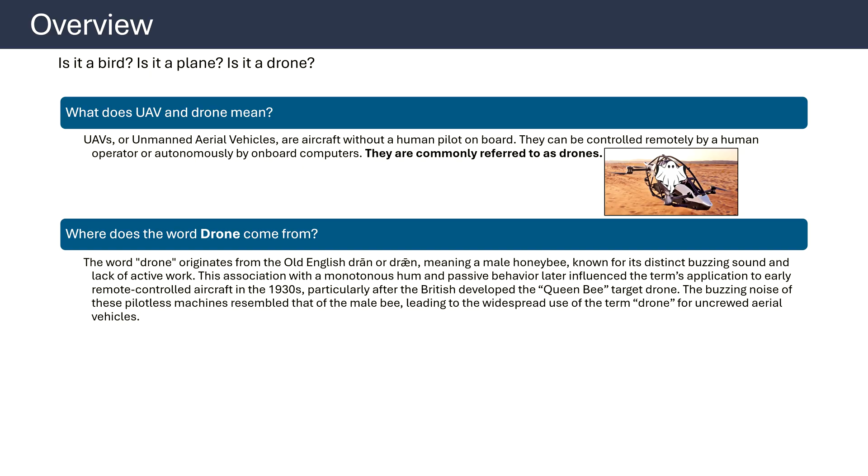An unmanned aerial vehicle, or UAV, is an aircraft with no pilot on board, flown remotely or autonomously. Drone is just a common shorthand. The word drone traces back to the male honeybee. In the 1930s, the British Queen Bee target aircraft had a distinct buzzing sound that popularized the term for pilotless planes.

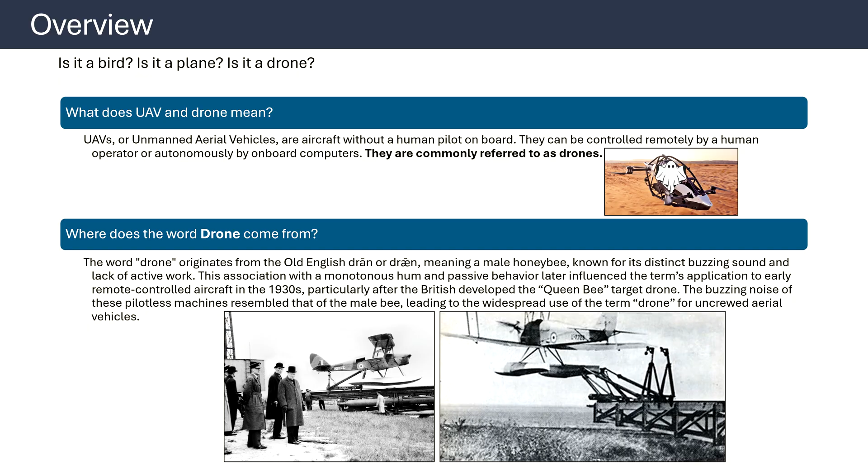The UAV industry in South Africa has evolved into a dynamic and multifaceted sector, combining world-class technological innovations with strategic applications across both civil and defense domains. As of 2024, South Africa's UAV market is valued at over $500 million, with projections of surpassing $1.2 billion by 2030. Home to a diverse ecosystem of drone manufacturers such as Alti, Denel Dynamics, and Milkor, the country also hosts leading subsystem providers like S-Plane Automation and Rautec.

Applications span precision agriculture, mining, infrastructure, inspection, security, and emergency services. While the industry benefits from duty-free imports on most components and a supportive government initiative under the fourth industrial revolution, it still faces regulatory and funding hurdles. Nevertheless, South Africa remains a regional leader, positioning itself as a hub for UAV innovation, services and exports across the African continent.

South Africa's UAV sector is set for rapid growth, fueled by advanced technologies like hydrogen propulsion, swarm systems, and AI analytics, alongside regulatory reforms enabling BVLOS operations. Backed by initiatives such as the Drone Council and Aerospace SEZs, the country is strengthening its manufacturing and exports, cementing its role as Africa's UAV innovation hub.

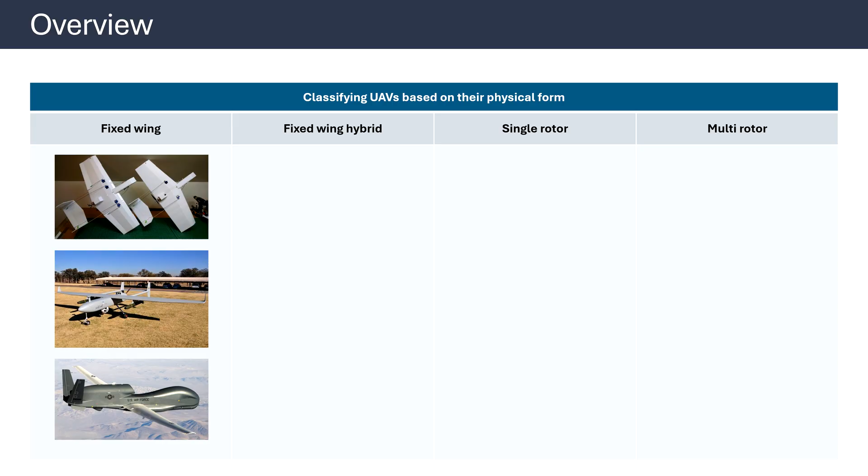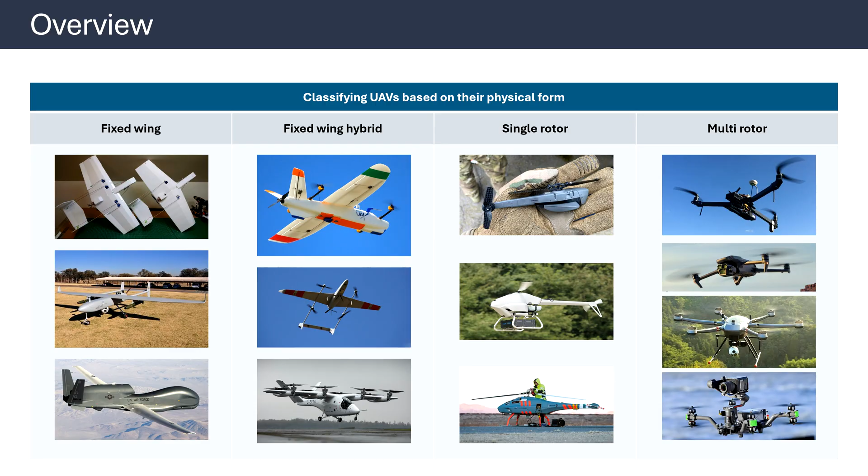Four form factors dominate the skies: fixed wing, a long-range endurance-based platform that often needs manual launch and landing solutions. Fixed wing hybrid VTOL has vertical takeoff, efficient wing-borne cruise, and is ideal for mapping and patrols. Single rotor or helicopter, efficient with heavier payloads but more mechanically complex. And then multicopter, the workhorse for inspections, media, and security. Agile hovering but with shorter endurance.

In the mid-1970s, the Council for Scientific and Industrial Research, CSIR, in Pretoria began work with Kentron on a small lightweight surveillance UAV called the Champion, which first flew in 1977. Four were built, a pre-production model and three production models numbering 101 to 103, and some or all were deployed to what was then Rhodesia for operational trials, while providing surveillance assistance in that country's civil war. This set an early lab-to-field loop that set the tone for local innovation.

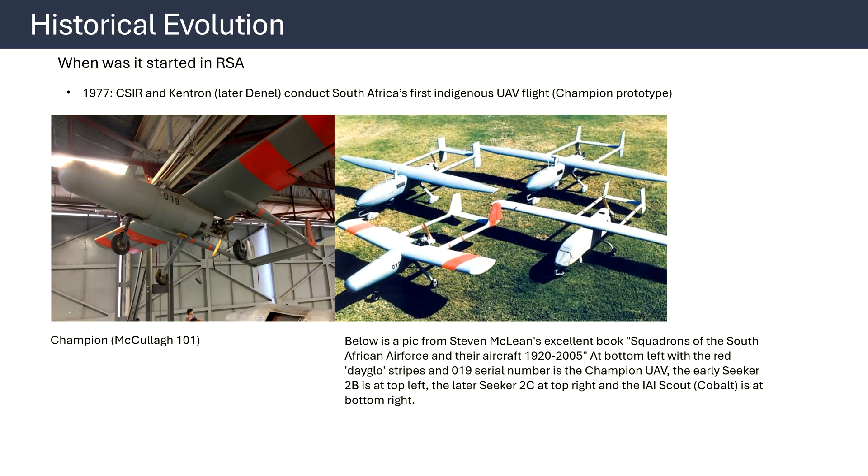South Africa's UAV timeline starts with CSIR and Kentron's Champion prototype in 1977, a laboratory-to-field leap that set the engineering tone for decades. Through the 1980s, the SADF fielded IAI Scout systems operationally, establishing doctrine and crews. In 1987, the locally built Seeker-1 entered service and saw real-time combat use, anchoring an indigenous capability. In 1994, Seeker-2 brought upgrades and experimental stealth work like Seraph, while ATE's Vulture introduced zero runway, catapult launch and net recovery tactics suited to bush operations.

In 2004, Denel unveiled the Bateleur concept for long-range maritime surveillance. Civilian crossover accelerated next in 2012 as Seeker-2 supported anti-poaching in the Kruger National Park, and by 2014, Desert Wolf's Skunk octocopter pioneered non-lethal crowd control payloads. Regulations caught up in 2015 when Part 101 made South Africa the first African state with a comprehensive drone rule set, catalyzing a commercial boom.

Hybrid VTOL leadership followed as Alti popularized transition platforms in 2016-2018. The country's export credentials strengthened with Seeker 400 deliveries in 2021, and Africa's largest indigenous MALE, the Milkor 380, achieved its maiden flight in 2023.

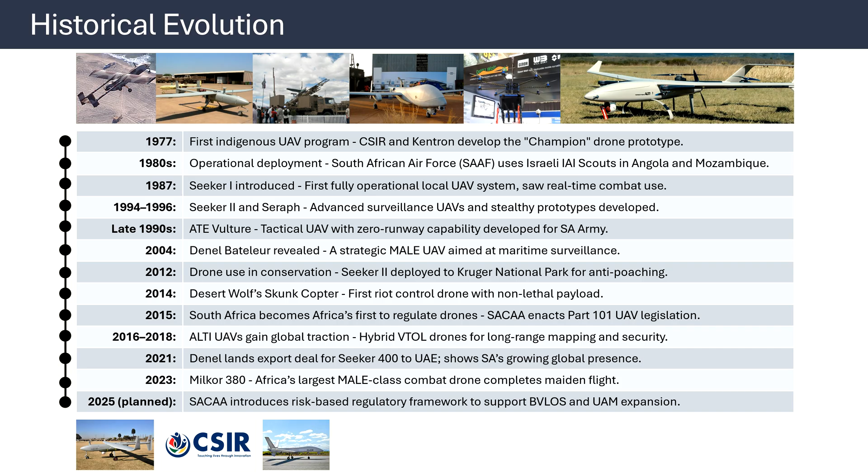Here's the map for the rules of the road. South Africa's drone regime sits on the Civil Aviation Act, with Part 101 and CATS 101 as the day-to-day rulebook. Commercial flying pairs people approvals with organizational approvals and basic airworthiness. South Africa's drone rules rest on three layers. The Civil Aviation Act of 2009 sets the legal foundation. The Civil Aviation Regulations, notably Part 101, spell out how RPAs are operated, and CATS 101 provides the technical standards that make those rules enforceable.

In practice, Part 101 is the everyday rulebook shaping who may fly, what must be approved, and how the risk is contained in commercial missions. It's also worth remembering that South Africa led Africa by publishing a comprehensive drone rule set under Part 101 back in 2015, which is why so much of the industry language you'll hear maps back to this structure.

If you're flying for business, you stand on three pillars. First, the Remote Pilot License, RPL. You must be at least 18 years old, hold a Class 3 medical, pass theory, and demonstrate competence in a flight test. Second, the Remote Operator Certificate, or ROC, at company level, which formalizes your SMS, operations manual, and named post holders. Third, Operations Specifications, or OPS specs, the exact privileges that you are authorized for, such as night operations, E-VLOS, B-VLOS, or dropping articles.

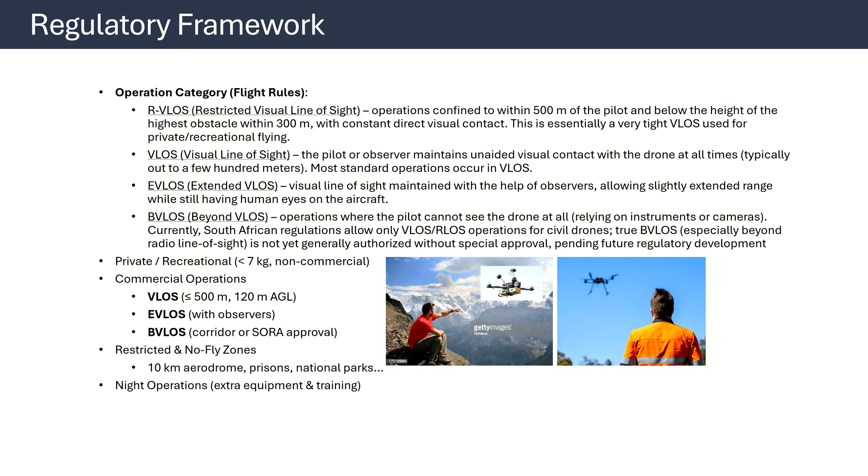Flight rules scale by risk. RVLOS keeps you within 500 meters and below nearby obstacles. VLOS means you or an observer can always see the aircraft unaided. E-VLOS extends range with trained observers and an agreed-on communication plan. And B-VLOS takes you beyond visual line of sight, only with specific authorization and robust mitigation. B-VLOS demonstrates detect and avoid, reliable C2 links, and fail-safe profiles backed by procedures and training.

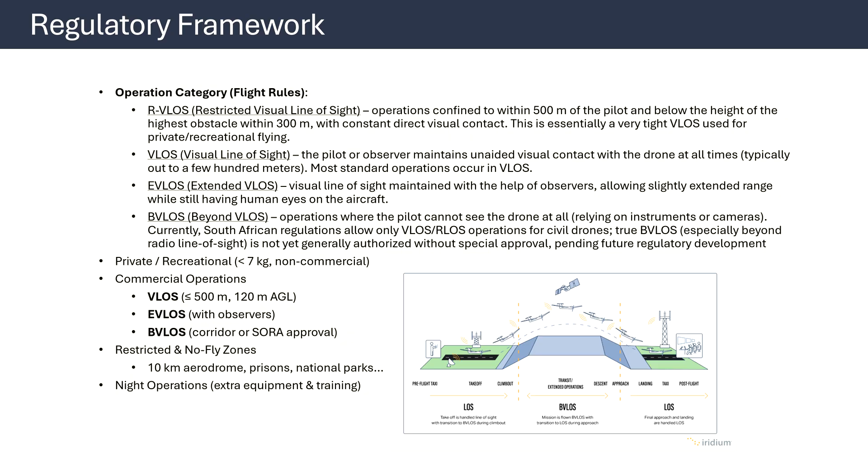Baseline commercial limits remain less than 120 meters above ground level, daylight only, and standoff from people, roads, and buildings, with a 10-kilometer buffer from aerodromes, unless coordinated and approved. Integration is happening step by step through controlled trials and corridors. South Africa has enabled B-VLOS experimental corridors, such as the Western Cape's Drone Corridor and the Krugersdorp test range, while prototype use-based trials explore live tracking, dynamic geofences, and remote authorization.

But B-VLOS remains permission-based. Operators submit CONOPS with mitigations like DAA, long-range C2, and structured risk assessment. A notable case was United Drone Holdings, securing South Africa's first B-VLOS waiver by fitting Iris Automation onboard detect and avoid to autonomously avoid conflicts.

Safety lives in routines. It is recommended to run pre-flight risk assessments such as SORA-Lite, so hazards and mitigations are explicit. Follow battery safety and lithium-ion fire protocols. Satisfy detect and avoid expectations as mass and mission risk increases. Keep clean maintenance schedules and logbooks for both aircraft and pilot.

Currently, regulators and industry are converging on geofences as the default safety net and remote ID as the digital license plate, alongside a national UTM position to enable routine BVLOS through live tracking and conflict alerts.

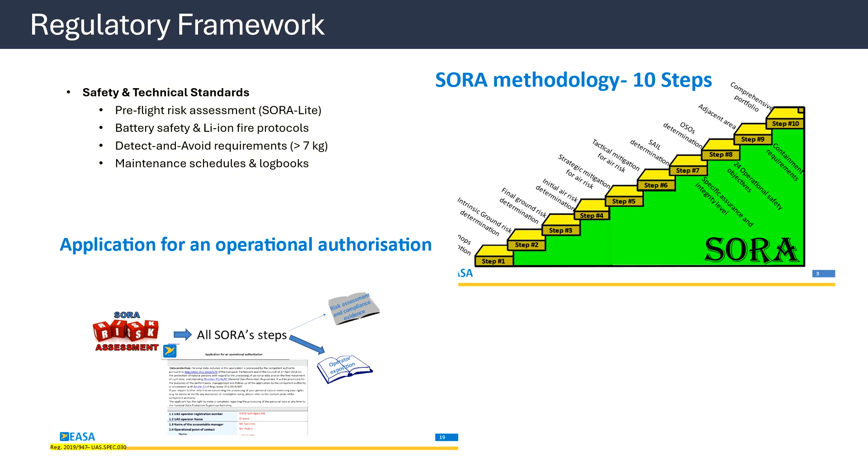Non-compliance has real teeth. Authorities can impose fines of up to 50,000 Rand and in severe cases imprisonment, with the SACAA ramping up inspections and SAPS's RPAS team backing enforcement. At the same time, South Africa aligns its approach with international risk-based models such as ICAO, JARUS SORA, and parallels to the FAA. As the system shifts, it will streamline approvals for well-mitigated missions, while clamping down on risky behavior.

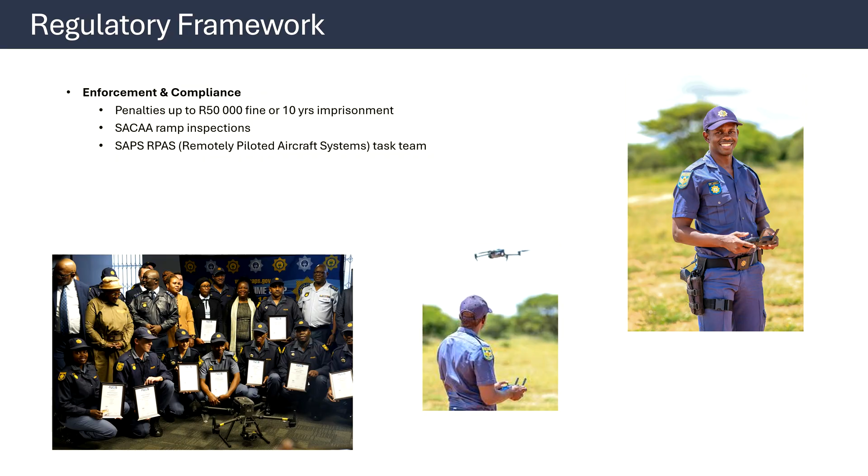Much of what powers modern drones was borrowed and then refined for aviation duty cycles. High-torque brushless outrunner motors from the RC world, paired with fast electronic speed controllers, give multicopters the precise low-latency thrust changes they need to hover, hold position, and lift meaningful payloads. Lightweight lithium polymer packs from consumer electronics devices deliver excellent energy-to-mass ratios.

Phone-grade MEMS IMUs feed flight controllers the data that stabilize the airframe, while multi-constellation GNSS provides waypoint navigation and return-to-home accuracy. Composites from aerospace and sport keep structures stiff and light, and gimbaled CMOS cameras turn airframes into mapping and inspection media tools. Finally, robust 2.4 and 5.8 GHz radio links use frequency hopping and smart antennas to close the loop between pilot, payload, and aircraft.

Under the hood, modern UAVs center on a flight control stack like Pixhawk, Cube Class, or S-Plane Autopilot running ArduPilot or PX4, coupled to a mission computer that handles autonomy, geofencing, terrain following, and failsafes. Airframes are mapped to missions: multi-rotors for precise hover, fixed wing for efficient cruise, and a hybrid VTOL for the middle ground.

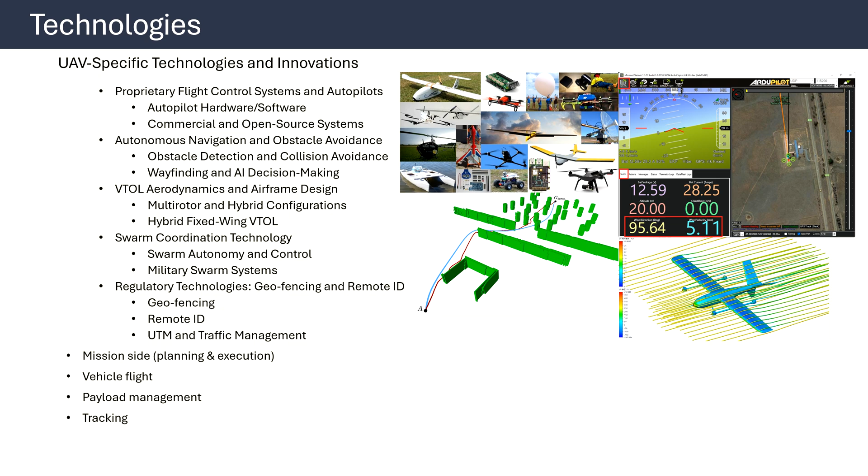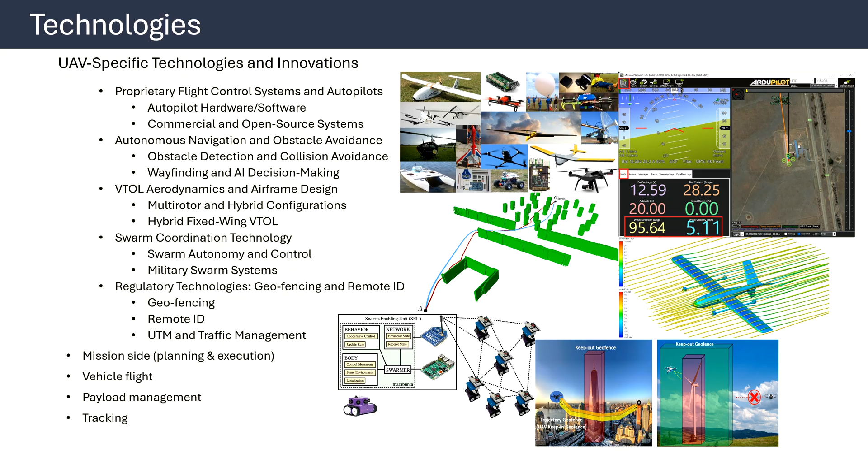Payloads give purpose. Sony A-series mapping cameras, Cube 240 LiDAR for true ground models, and stabilized infrared gimbals for inspection and security. For integration and safety, we layer parachute recovery and detect and avoid like Iris Automation, Casia.

The next leap hinges on industrializing what works in demos. BVLOS at scale requires certified detect and avoid systems, resilient long-range C2 with spectrum discipline, and integrations with geofencing, remote ID, and more secure communications like ExpressLRS and Crossfire, and evolving UTM services.

Onboard autonomy and AI analytics should turn raw imagery and LiDAR into actionable maps, crop indices, defect detection, and secure alerts without heavy processing. Maturing homegrown sensors, avionics, and mission computers will reduce import bottlenecks and harden the supply chain.

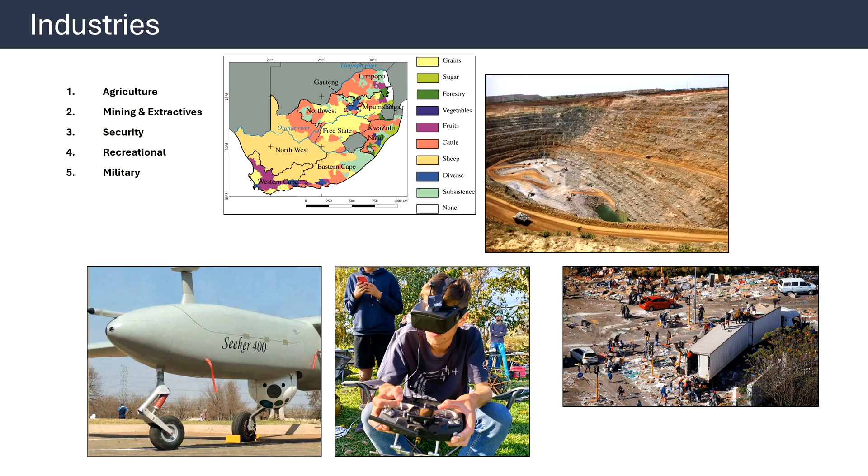The South African drone market clusters into 5 practical arenas: agriculture for crop health, spraying, and yield forecasting; mining and extractives for stockpiles, pit models, and hazardous area inspections; security and public safety for patrols, incident responses, and anti-poaching; recreational for events and cinematography; and finally military for ISR and technology trials.

South African agriculture is primed for drones because large, varied farms need fast, repeatable field-level analysis that doesn't trample crops. The market is already active at around 60,000 hectares a month that are flown for mapping, crop health, and spraying. With agricultural drones, revenue is projected to rise from 55 million in 2024 to 184 million by 2030, as producers chase water, fuel, and chemical savings alongside yield gains.

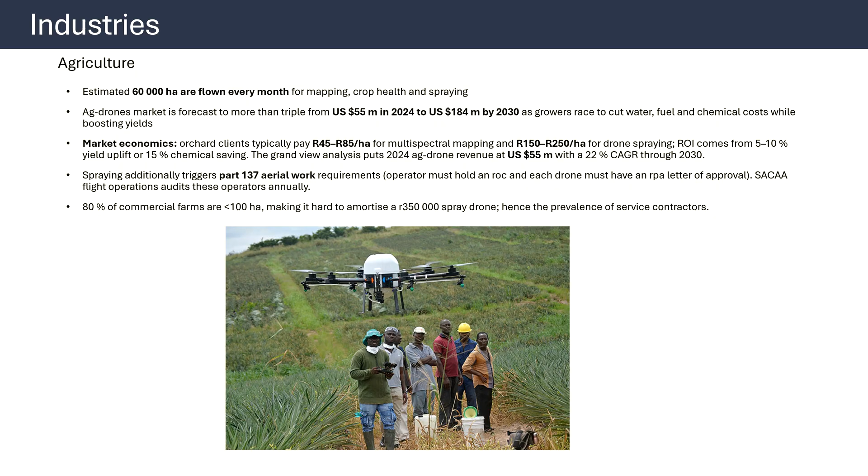On pricing, orchards typically pay 45 to 85 Rand per hectare for multispectral mapping and 150 to 250 Rand per hectare for spraying, with returns on investment of 5 to 10% yield gain and a 15% chemical saving. Note that spraying counts as Part 137 aerial work, so licenses are needed per operator and aircraft. With 80% of commercial farmers having less than 100 hectares, many producers prefer contractors rather than buying a 350,000 Rand spraying drone outright.

Step 1 is situational awareness. A short, low-altitude RGB mission delivers centimeter orthomosaics to check roads, fences, wind damage, and pest hotspots. Add multispectral, and you compute indices like NDVI to spot stresses before they're visible. Local leaders show how this scales. Aerobotics dominates fruit and nut analytics with drone scans and yield forecasting, while RocketMine flies VTOLs with LiDAR to build canopy and elevation models for sugar, timber, and large estates. The workflow stays simple. Plan the grid, fly, stitch, then annotate actions so farm teams can act within 72 hours.

Orchards are a South African strength, and per-tree analytics are where drones shine. Imagery separates canopy from shadows so you can count trees, size canopies, and classify health. Then fuse with ground data and pack-out history for block-level yield forecasts weeks earlier than manual sampling. The payoff is better labor planning, smarter picking windows, and fewer surprises at the packhouse, while multispectral, thermal missions, LiDAR modeling, and vineyard block zoning round out robust scouting toolkits already common in Western Cape estates.

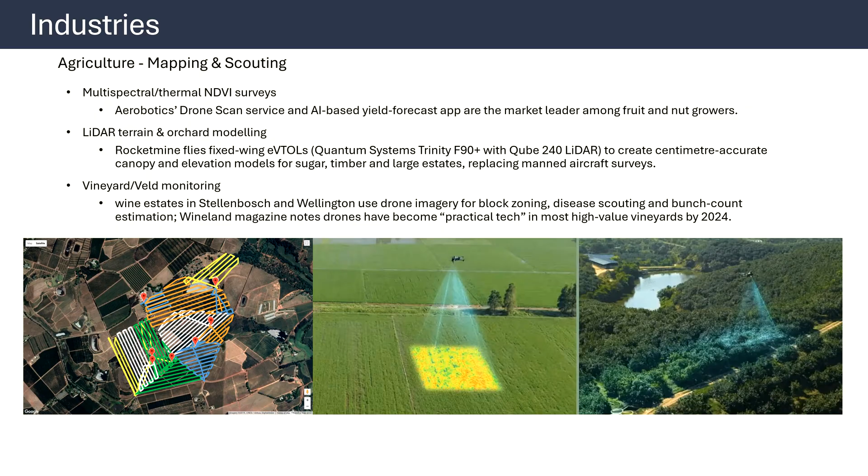Sprayer drones make targeted interventions practical. They reach awkward blocks, operate where tractors would bog after rain, and keep people away from chemicals. This is not without its own challenges. You need to nail droplet size, ground speed, swath spacing, and buffers. In South Africa, this counts as dropping articles, so OpSpecs must cover it. Pilots hold RPLs, and drift mitigation is documented. Paired with variable rate prescriptions, teams treat only stressed zones to curb inputs without hurting yields.

Water is gold. Thermal and multispectral flights flag over- and under-irrigation, blocked emitters and leaky valves on pivots, while in orchards, you rank blocks by stress, so irrigation matches actual demand and not averages. The SACAA issued the first spraying ROC in 2020 for a DJI Agras MG-1P via DC Geomatics, and many operators now integrate Aerobotics scouting to drive prescriptions for variable rate actions. A 20-minute flight can save a week's worth of guessing and an entire season's yield.

Beyond crops, long-endurance VTOLs such as Alti Transition or Denel Seeker 2 with thermal payloads support night patrols on game farms, while mixed crop-livestock operations use small multi-rotors to locate stray cattle and check fence lines without the 30-kilometer bakkie run. Good agricultural operations stay quietly compliant. Fly VLOS or EVLOS with agreed buffers near homesteads and public roads.

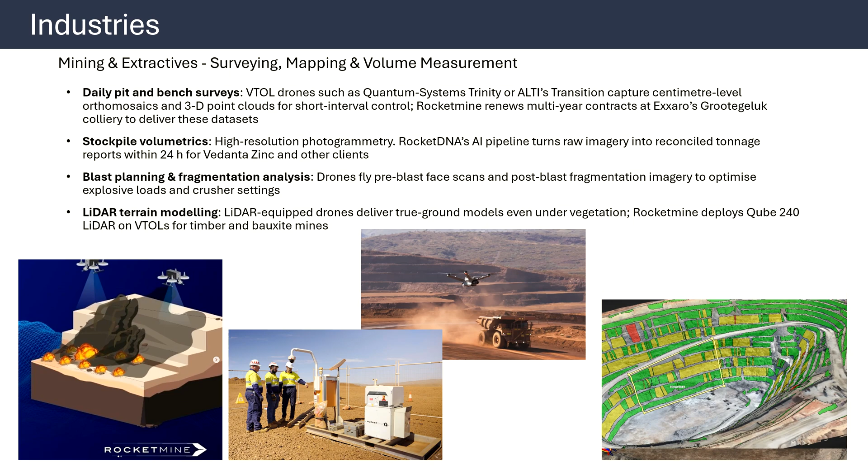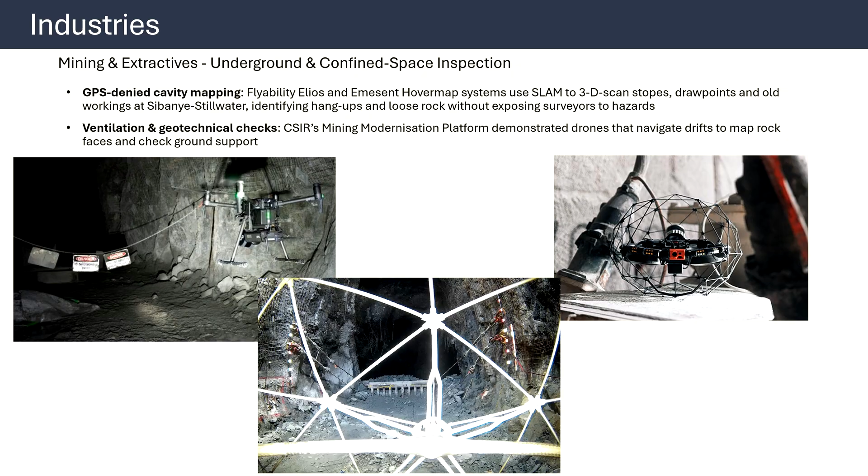Where it's GPS denied or unsafe, Flyability Elios and Emesent Hovermap rigs use SLAM to 3D scan stopes and drawpoints, while CSIR's mining modernization program has shown drift navigation for rock face mapping and ground support checks. In open pits, the priority is geotechnical risk, so dense, high overlap point clouds track berms, benches, and faces over time, with LiDAR or thermal helping to keep models honest in dust and shadow, so small sloughs, blocked drains, or tension cracks are caught early without putting any person in danger.

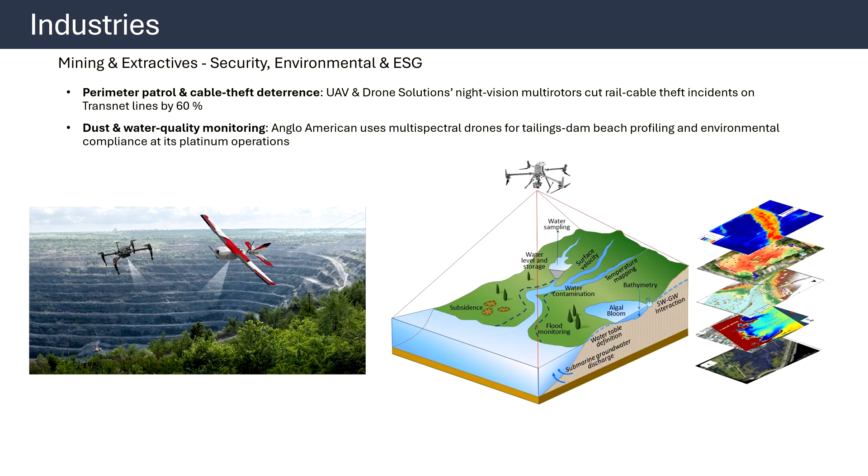UAV and drone solutions report night vision patrols cutting rail cable theft incidents on Transnet lines by about 60%, while Anglo American uses multispectral flights for tailings dam beach profiling and environmental compliance. Standardizing dam surveillance with fixed flight lines, consistent altitudes, and repeatable overlap lets teams compare apples with apples month to month, capturing crest-to-toe conditions, beach widths, freeboards, spillways, and downstream vegetation, with thermal flagging seepages and obliques revealing cracks or rutting, so small anomalies become actionable work orders before they can escalate.

Commercial models are now well defined. Survey days typically bill 12 to 25,000 rand, or 180 to 350 per ton for stockpiles, with the value chain splitting into drone as a service providers like Rocketmine, users like Exxaro or Anglo American, hardware OEMs like Alti and DJI Enterprise, and analytics platforms like Rocket DNA Cognition.

Under the hood, mining fleets mix VTOL fixed wings like Alti Transition and Trinity F90 Plus for wide area mapping, with multi-rotors like DJI M300 and Flyability Elios for close inspections. They carry RGB, LiDAR, hyperspectral, gas, and thermal payloads, while GNSS, RTK, or PPK, terrain following, and SLAM keep models accurate and underground flights safe.

Edge or Cloud AI now turns data around in hours. Think Rocket DNA Cognition, auto-volumetrics, and dust plume detection. So results land quickly in SAP, Pitram, or Hexagon mine ops. Inside plants, drones take hard jobs on stacks, conveyors, roofs, and tanks, flying closer and safer than any rope crew can.

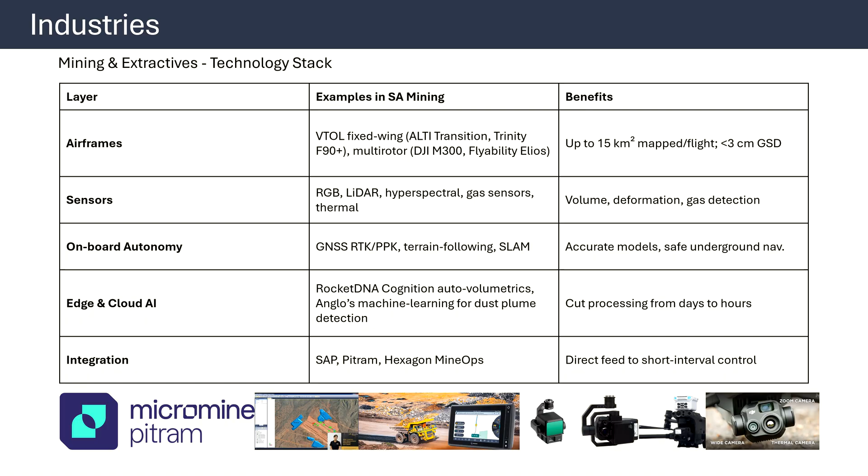Security is where drones feel like a true superpower. Licensed operators now fly thousands of autonomous patrols every month across private estates, mines, rail corridors, power lines, wildlife reserves, and metro police using multi-rotors for reconnaissance and tracking. The value shows up in the outcomes: cable theft incidents dropping dramatically, guards removed from the riskiest positions, quicker nighttime arrests, and reserves going rhino poaching free for hundreds of days at a time. Plus, hard costs and speed benefits where deliveries fall from hours to under an hour at a fraction of a vehicle's cost.

Good patrols are boring by design, and that's the point. We pre-plan geofenced corridors along fences and servitudes, add short dwell holds over gates, corners and blind spots, and stagger times so flights aren't predictable. An RGB zoom camera gives positive ID while thermal handles detection, with a spotlight or siren if needed. Every sortie writes its own audit trail: who looked, when, and at what, which makes investigations faster and keeps contractors and site owners aligned on what was actually seen.

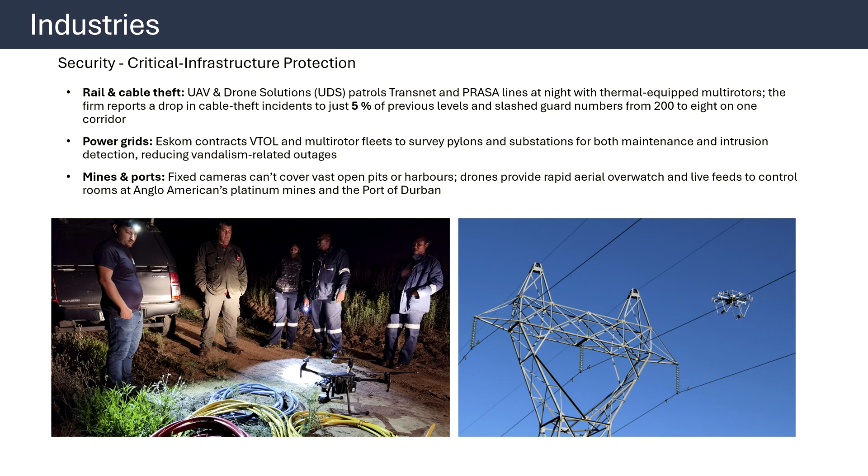When an alarm trips, the playbook is speed and clarity. The drone launches to a pre-authorized hold point. The payload operator zooms in for confirmation, and live video streams to the control room and supervisor's tablet. We mark last known locations and likely egress routes on the shared map and hand exact coordinates to ground teams. There is no escalation from the air. We simply shorten the loop between alerts and on-scene intelligence.

At events and in hotspots, the drone becomes a floating overwatch. By day, we watch ingress, queues, and choke points. By night, we switch to thermal for crowd density and heat stress cues. Flight paths stay outside the crowd volume with safe lateral offsets, and we pre-brief a contingency if communications drop. The deliverable is simple: a live map with markers during the operation, and a short post-event note on what went well, where bottlenecks formed, and where to add barriers, lighting or signage next time.

In reserves, the priorities are detection and deterrence. We fly quiet routes downwind to reduce acoustic signatures, use thermal to pick up heat signatures, and avoid patterns that tip our hand to repeat offenders. Coordination is crucial between rangers on the ground and the control room. Evidence handling matters too: timestamped videos, GPS fixes, and a clean chain of custody note, so that prevention remains the primary goal, but prosecution stands up when needed.

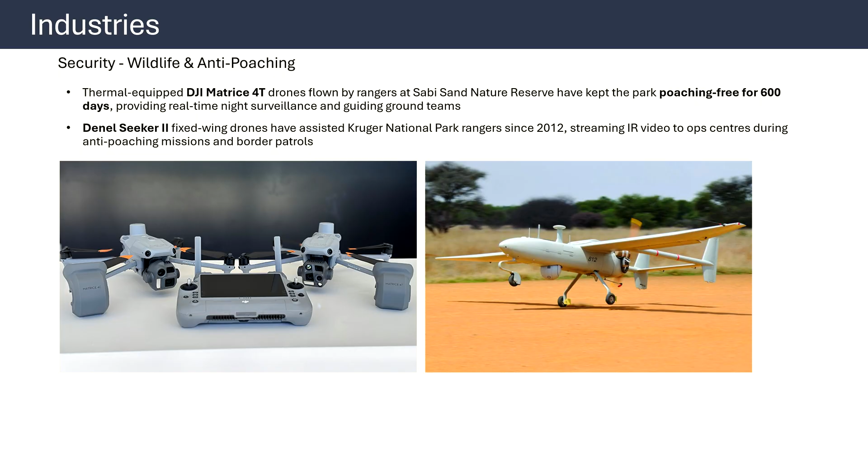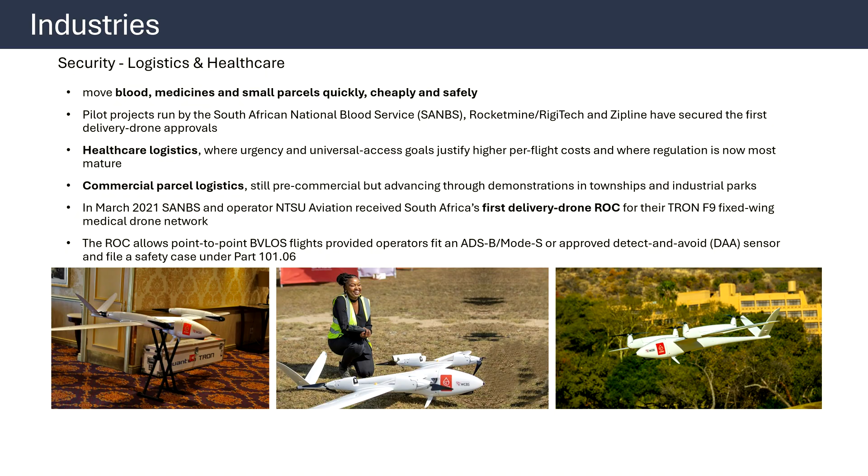Corridor approvals now allow operators to fly repetitive BVLOS legs inside predefined airspace blocks once the risk assessment is signed off. We treat each leg like a rehearsed airway: pre-surveyed launch and land boxes, contingency fields, lost link logic, and check-in points, with geofencing, remote ID, and UTM integration layered on top. These corridors turn a once-off waiver into a predictable, schedulable service.

Here's how these projects translate operationally. A hub-and-spoke network moves critical payloads between clinics and district hospitals on fixed routes, with aircraft sized for range and pod payload. Point-to-point demos prove the BVLOS link and ground handling, then scale into permanent legs servicing pathology labs and blood depots. A new humanitarian partnership extends the same model to time-sensitive medicines using on-demand drops.

Across all three, the operating model is identical: pre-cleared routes, standardized handoffs at each node, and a tight SLA from request to received. During the pandemic, we learned that fast enough by road often isn't. BVLOS flights ferrying PCR samples prove that a small aircraft with the right approvals can outrun traffic and terrain to keep labs on schedule. The lesson sticks beyond COVID. For any time-critical medical or emergency management payload, an aircraft is a resilient backstop when roads fail or surge.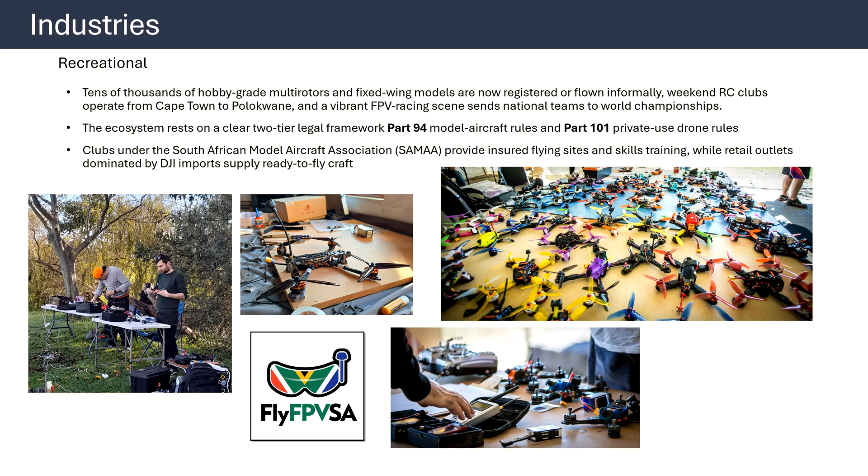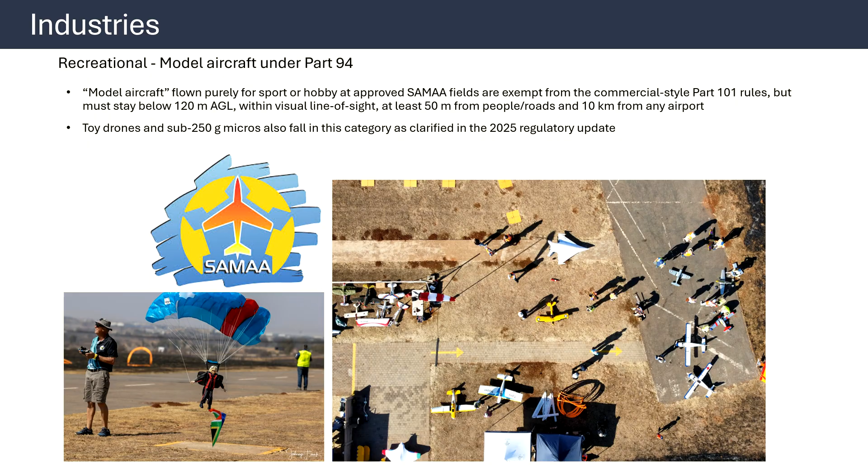When you are flying purely for sport at an approved SAMAA field, you are under Part 94. The 2025 update also clarified that toy drones and sub 250 gram micros also live under these regulations now. Stepping off a SAMAA field, say to go film the Garden Route, then Part 101 for private operations applies. You still don't need a license, but you must obey the same altitude, distance, and day VLOS limits. Keep a simple flight log and have the landowner's permission. Night flying or FPV goggles requires an additional trained observer.

SAMAA is recognized by the SACAA as an aviation recreation organization and counts roughly 4,400 members across 100 plus affiliated clubs and special interest groups. The backbone of safe insured flying sites and mentoring for new pilots. On the edgy side, FPV brings immersion and dynamism, but demands discipline.

The community spans formal sport and casual creators. Team SA FPV competed in the 2024 FAI Worlds in Hangzhou. Local pilots log times on MultiGP boards and organize meets via Fly FPV SA, while amateur aerial photography is also booming. On the kit side, DJI holds roughly three-quarters of the global consumer market, and South African distributors like Drone World and Action Gear stock the Mini, Air and Mavic lines alongside ND filters, insurance and repair plans.

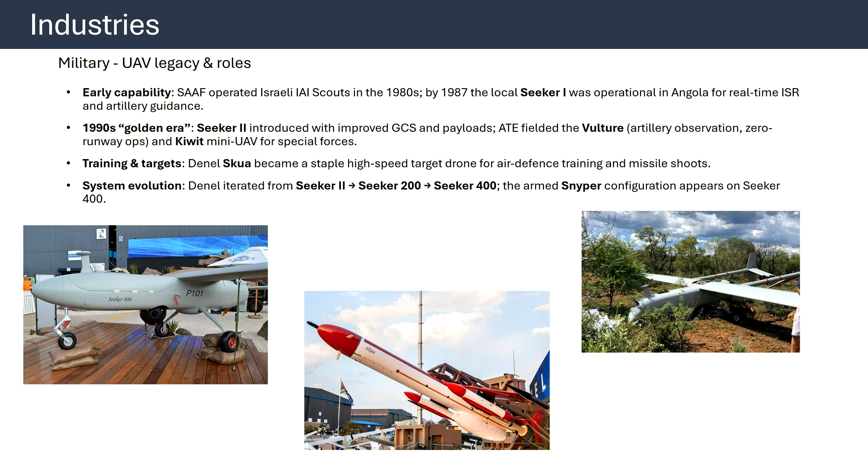The typical working areas are small tacticals for backpackable patrol ISR, tactical hybrids for mixed terrain with IR and comms pods, and medium altitude long endurance for border or maritime endurance. All built around the same payload logic: see, sense, know where, and share. The product line evolved from the Seeker 1 to the Seeker 2 to the Seeker 200 to the Seeker 400. And now with the armed configuration appearing on the Seeker 400.

Today's fleet reflects that evolution. Seeker 400 delivers 16 hours of endurance, 250 kilometers of range, and supports 100 kilograms of sensors. The Snyper variant adds precision strike with up to 4 Mokopa or Impi ordnances.

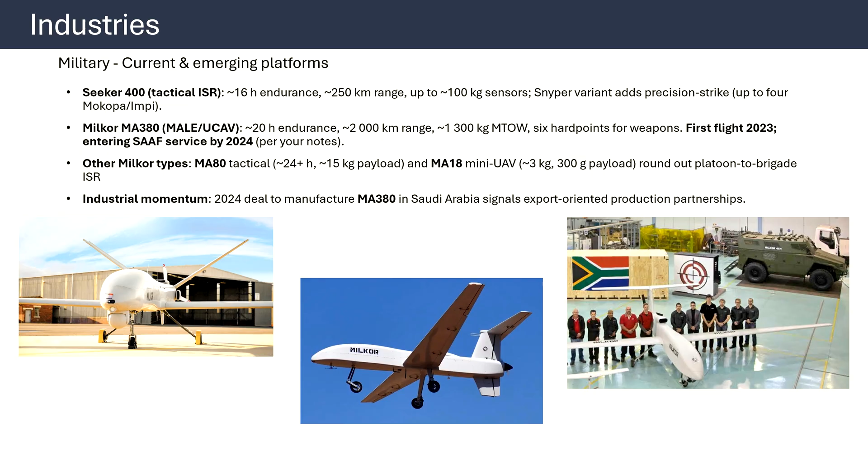The Milkor MA380 steps into the MALE tier with 20 hours of endurance, 2,000 kilometers of range, 1,300 kilograms of MTOW, and 6 hardpoints, while the MA80 and MA18 cover tactical and mini UAV roles. Industrial momentum is visible in Milkor's 2024 Saudi manufacturing deal.

For big systems, the rules get formal. NATO Class 1, 2 and 3 weight bands frame the doctrine, and STANAG 4671 informs airworthiness for larger UAVs. Practically, SA-designed large RPAs face customers who want a foreign type certificate or a military airworthiness release. There is no blanket FAA acceptance of South African RPAs, so resilience becomes part of the offer.

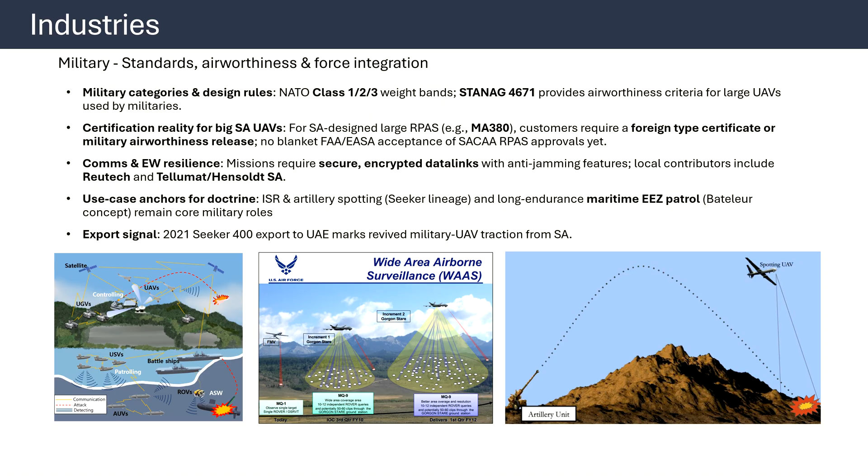Currently, the use of UAVs is reshaping the way warfare is carried out. In the Russia-Ukraine war, small FPV drones rule the sky. It all started with FPV drones targeting low-flying helicopters trying to avoid anti-air systems. Their small, fast and disposable nature makes them ideal for kamikaze attacks.

Ukraine carried out an extreme BVLOS mission in June 2025, attacking Russian strategic bombers with 117 small FPV drones smuggled into Russia and launched from concealed trucks, while the operators were almost 2,000 kilometers away. This method is currently so effective, both sides have pledged to add a combined 6 million extra UAVs to the fight.

South Africa's UAV market grows where three forces line up: regulatory enablement, sector pull from mining, agriculture and security, and capital to scale pilots into programs. Today, the market is service heavy, with select platform exports and strong subsystem talent. The slope to 2030 comes from the routine BVLOS corridor, faster data workflow, and cross-border work into SADC.

The landscape mixes a large state player with mid-sized service and tech firms. Denel Dynamics sits near 800 staff with group revenue around 3.7 billion. UDS lists 240 people with around 396 million in sales, noted via the Bidvest report, and a 500 million rand purchase price in 2019.

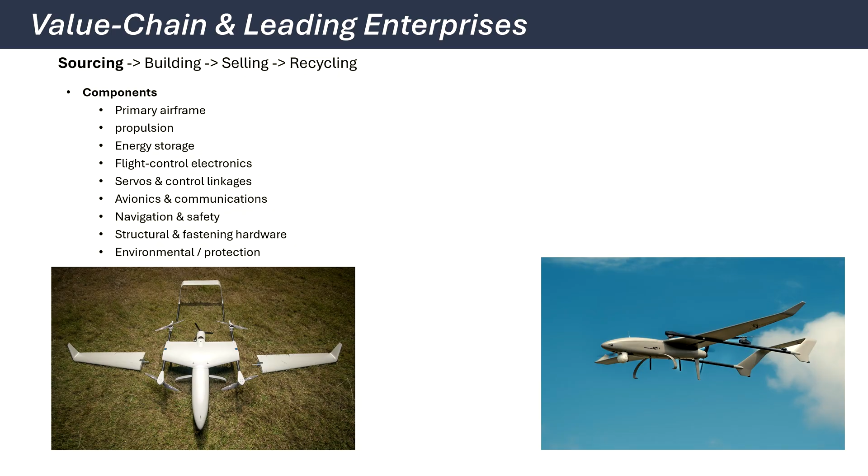Further behind every part is a wide bill of materials: carbon and honeycomb for the airframe, neodymium magnets and silicon steel laminations for the motors, lithium, nickel, cobalt, graphite for the batteries, PCBs and MEMS silicon for electronics, 6061 and 7075 aluminium, and A2 stainless for the structure, and epoxies for protection.

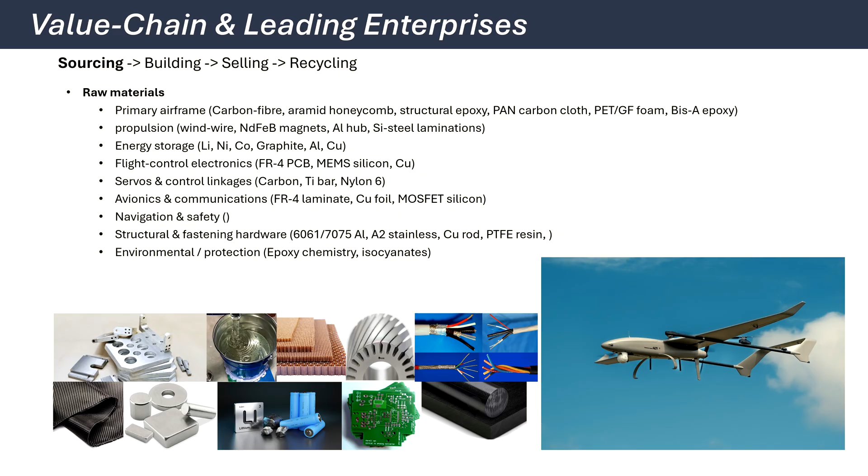South Africa is able to supply a vast majority of the required materials. AMT Composites and Aerontech bring carbon cloth, Sasol and NCS supply epoxy, Hulamin and Columbus Steel feed alloys, Palabora copper is drawn by Aberdare, rare earths tied by Steenkampskraal, lithium inputs span Kalahari Lithium and Bikita, plus local PCB assembly and electrical steel. But unfortunately, some processes simply can't be done yet on the African continent.

PAN-based carbon fiber cloth is all imported as no local carbon fiber plant exists yet. So too for aramid honeycomb cores imported via Aerontech. For neodymium permanent magnets, SA can supply the raw oxides, but magnets are still sintered in China. Semiconductor chips are also imported, only PCB assembly happens locally. LED chips are imported and then SMT assembled locally. Finally, titanium ore is local, but smelting happens yet again offshore.

Once all the required materials are collected, the design and build phase can begin. Using skilled design and manufacturing engineers, paired with testing and validation methods, this will seamlessly combine the aircraft's flight computers, IMUs, GPS, magnetometers, radios, gimbals, and power systems.

South Africa's advantage is the system integration, making multi-vendor parts behave like one aircraft with configuration control, firmware baselines, and tight flight test cards. Representative players span materials and aerostructures like AMT and Aerontech, flight critical subsystems like S-Plane, Hensoldt, Simera, and Reutech, and airframe OEMs like Alti, Denel Dynamics, Milkor, Aviator Labs, and Desert Wolf.

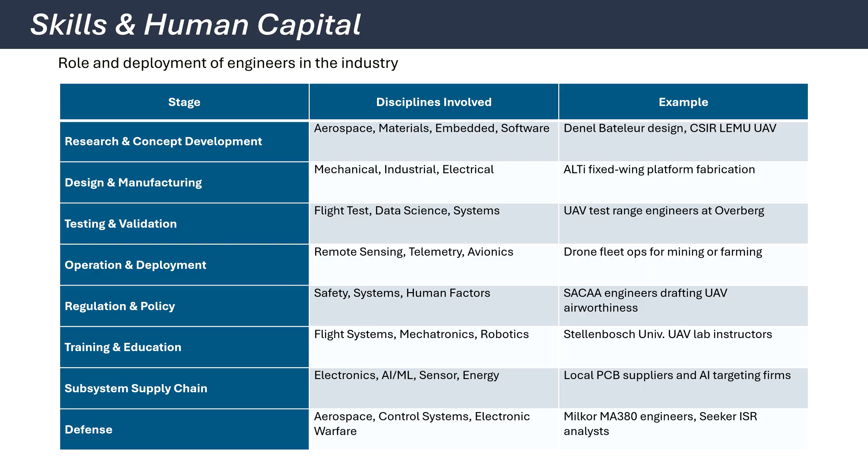Above all, UAVs are a team sport. Aerostructures, avionics, RF, GIS, data, compliance, and project operations must click. Many people start as technicians or pilots and grow into systems QA. If you can write and run a test plan, you can add value on day one.

Commercial UAV operations rest on three compliance pillars. Pilots obtain an RPL at an approved ATO. They maintain currency through recency and periodic proficiency checks, keep a complete logbook, and hold radio competence when required.

Organizations operate under an ROC with documented operations manuals, safety management systems or SMS, maintenance program, and evidence of training. Privileges are defined in operation specifications like nighttime flight, EVLOS, BVLOS, and spraying. And named post holders oversee compliance. Records, audits, and configuration controls must be demonstrated and traceable at all times.

Maintenance follows the OEM program and, where applicable, a UAS maintenance technician authorization. Good practice includes parts and battery traceability, airworthiness directives, and release to service entities aligned with the ROC's maintenance control system. The talent pipeline runs from university labs into ATOs and operators.

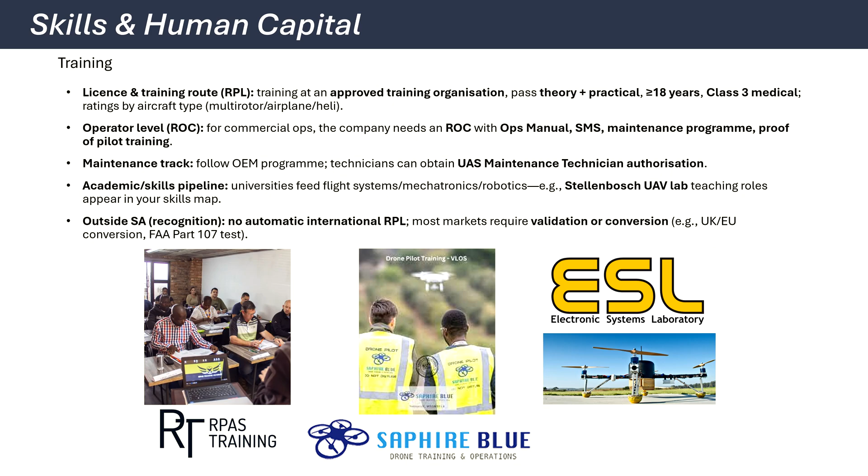Outside South Africa, the RPL is not automatically recognized. Most jurisdictions require validation or conversion. For example, the EU or UK conversion, or the US FAA Part 107. South African licenses and airworthiness letters are credible but not automatically transferable. Within Southern Africa and UN projects, validation is usually straightforward.

In the EU, you typically convert with your local air law and a short skills test, and in the USA, you must pass the FAA Part 107. But there's no foreign recognition of the RPL. SACAA can validate a foreign RPL into South Africa under SA-CATS 101 and will endorse foreign Class 3 medicals. EASA or FAA generally reissues locally.

For small UAS going abroad, there is no mutual recognition of an RLA, with importing states using their own ops authorization or requiring ASTM compliance files. For large UAVs, customers expect a foreign type certificate or military airworthiness release. There is no blanket FAA or EASA acceptance of South African RPAS design approvals.

This section deals with intrinsic risks of operating UAVs and the ethics that keep programs trusted. First is safety and airspace risk: mid-air or ground impact, lost link and battery thermal runaway. We mitigate these with disciplines like pre-flight risk assessment, conservative weather minima, robust link management, detect and avoid where needed, geofencing, redundancy, and rigorous maintenance and battery stewardship.